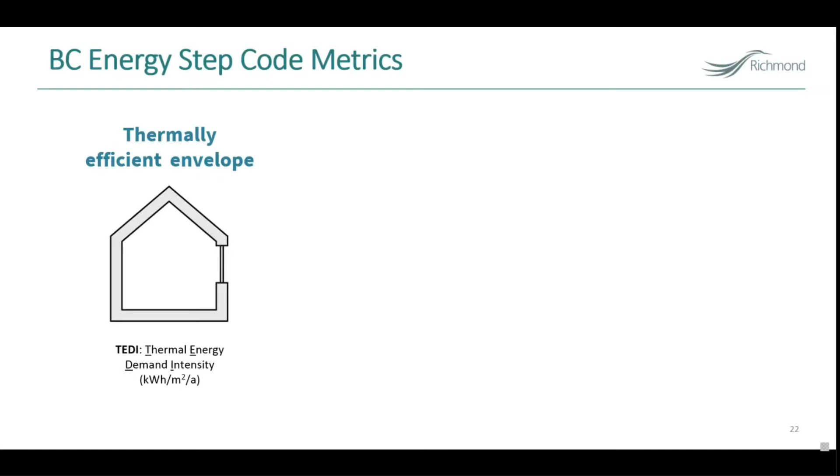Then we're looking at the air tightness of the building. So basically the rate of air leakage into the building, which is measured and looked at in terms of the ACH. And then we have finally the so-called MEUI, which looks at the mechanical energy use of the building. So the idea here is that these three metrics in combination give a complete picture of how well the building has been designed and constructed in terms of the building envelope, and then how efficient these mechanical equipment are for running the building and for air conditioning and other services.

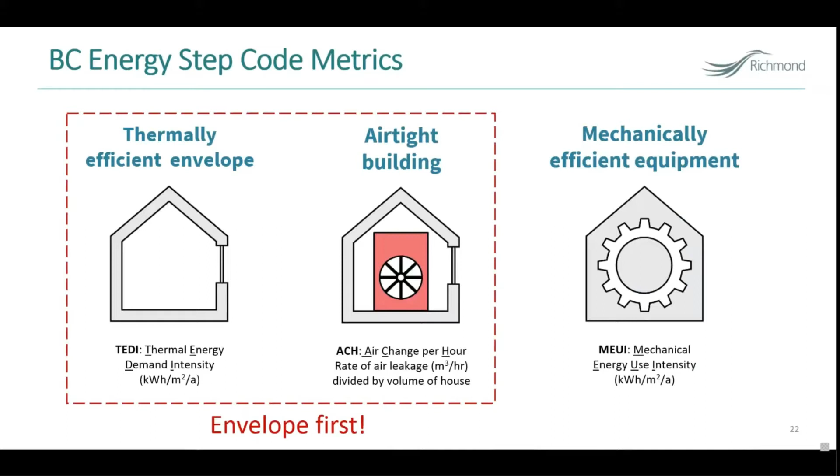So now the inclusion of these two first metrics, the TEDI and the air tightness metric, the ACH, is really based on the so-called envelope first approach, which is based on just very basic building science, which essentially means that the best and most sustainable way of achieving energy efficiency and net zero energy readiness in the building sector is to start with a highly efficient building envelope, which is also airtight. So that was recognized in the procedure leading up to the development and adoption of the Energy Step Code. So that was great. This was recognized, and that was the reason we had these three different metrics.

Now, what happened last year, last November, and I think coming into effect last December, was that there was a revision to the building code, as is usual every couple of years or every year. And then in that revision, among the changes pertaining to energy efficiency and the Energy Step Code specifically, a new metric and a set of new targets were introduced for looking at the thermal performance of your building envelope.

So here in this table, we don't need to get into all the details. I'm happy to discuss that in the question and answer section. But we had these targets for different steps, starting at step 1 and leading up to step 5, which is the stated end goal of the step code by 2032, and that's equivalent to net zero energy readiness. So we had these targets for TEDI, indicator of the thermal efficiency of the building envelope.

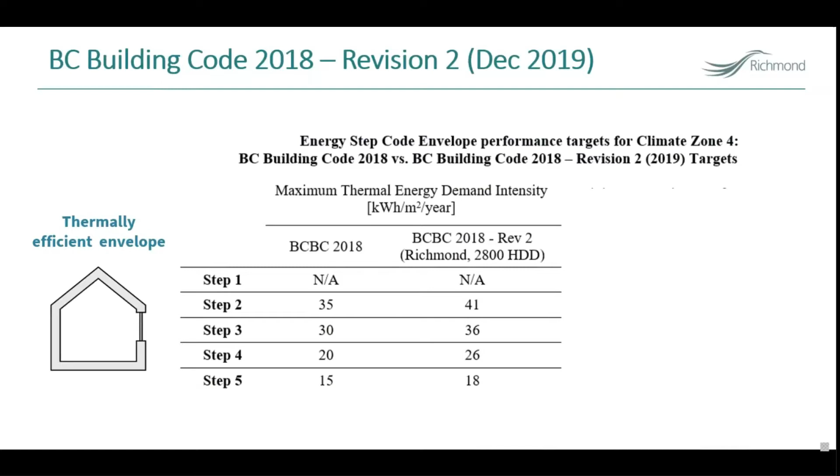The first change introduced last year was that the province introduced an adjustment to these targets. And as you see in the table, there is a relatively minor discrepancy, and basically it has become somewhat more lenient, which is cause for concern. But compared to the second change, which was the introduction of these relative performance targets, the reference building approach that Rob introduced, this is the real problem now.

And I remember when there was some communication from the Building Safety and Standards Branch from the province last year, there was an email saying, well, look, the new revision to the code is coming into effect in a few weeks, and these are some of the changes. And I was going through that, and I was obviously interested in stuff relating to the step code, and I came across these relative performance targets.

And I remember I looked at the target for step 2, and I looked at 5%, and I was going, really? How are you even going to measure that? Is it even meaningful, given all the building energy modeling tools that we have, to talk about 5% improvement? And that methodological question aside, is that even significant? Is that going to drive the change that we need to see in our building sector to move toward net zero energy readiness in a span of almost a decade now?

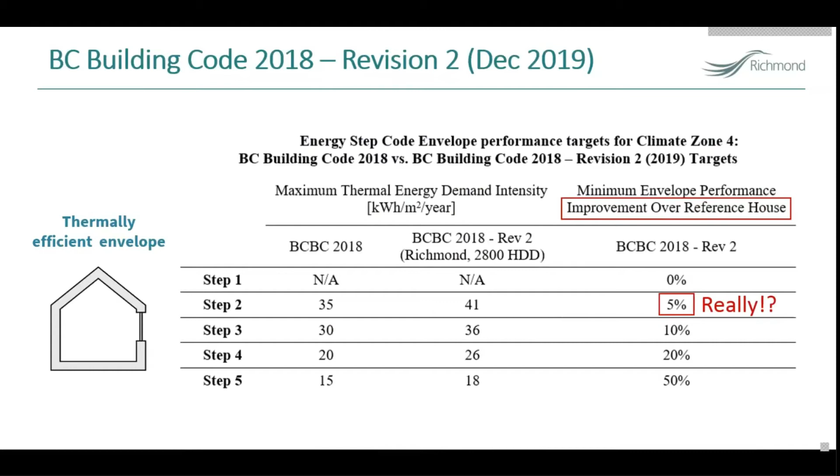So that got my interest, and I started looking into that in more detail. And fast forward a year later, I have spent a lot of time looking at data from our jurisdiction in Richmond and also other municipalities in our area. And then, to just sum it up very concisely, I think this graph will tell what's happening there and what the core problems are.

So here you see the average improvement in the thermal efficiency of the building envelope that we would get based on the original absolute performance targets. And here we're now looking at steps 2, 3, and 4, just for simplicity, but you can extend the analysis to the entire range from step 1 to step 5. So these were the original targets prior to December 2019, prior to the latest revision to the code.

And then those adjusted targets that I talked about, the minor adjustment introduced to still absolute numbers, are making things a bit easier. But then you look at the relative targets, so the intended improvement over the so-called reference house. And then you see there is this major discrepancy between what was originally proposed and put in place, which, as Rob mentioned, is informed by climate science. It's not some arbitrary number that we come up with.

This is based on the fact that the end goal is to achieve 15 kilowatt hours per square meter annually in order to make net zero energy buildings a reality. So you look at the blue bars here, and then you look at the red bars, which is what you will get from the new relative targets. And of course, if you have a more lenient, more easily achievable pathway in the building code, that's going to encourage people to take the easier route.

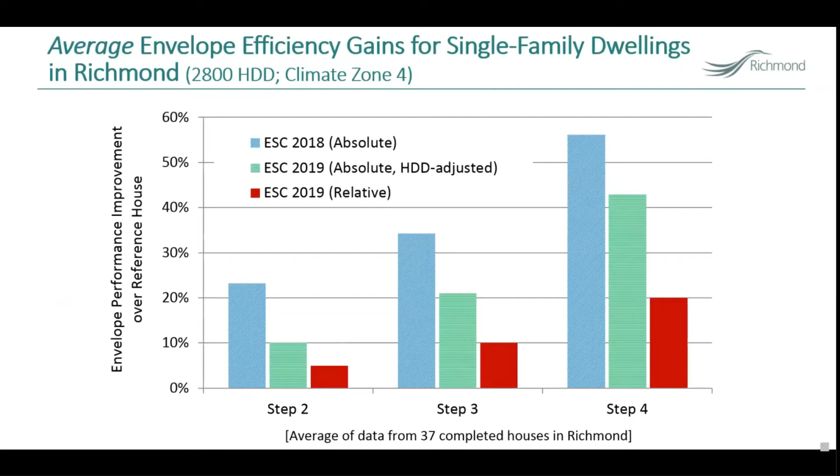But now, by extending that approach, which is also the approach taken in the national code, we are really watering down the energy step code. And our concern, as I'm going to go through quickly, is that we're not going to be able to achieve the goals that we have and we must achieve with this current code. Now, just to illustrate the problem and the disconnect that Rob mentioned, and the discrepancy that we see in these targets now, let's take a look at this graph.

Now, one of the problems with this reference house approach is that, as Rob mentioned, this reference house is a fictional hypothetical building where, in your building energy modeling, you're saying, okay, so I have this proposed design. What if I had built the same house, the same form factor, geometry, orientation, all of that, to the code minimum requirements, the prescriptive requirements of the code? How would my house have performed had I built it to code minimum? And then you run that in your energy model, and you compare it to the energy performance of your proposed house.

So these are all houses of the same archetype. So these are single family dwellings in the same climate zone 4. And now you see that depending on my design, where I'm putting my windows, how much window area I have, what is the orientation of the house, how much articulation I have in the building envelope, I have a very wide spectrum of my reference house TEDI.

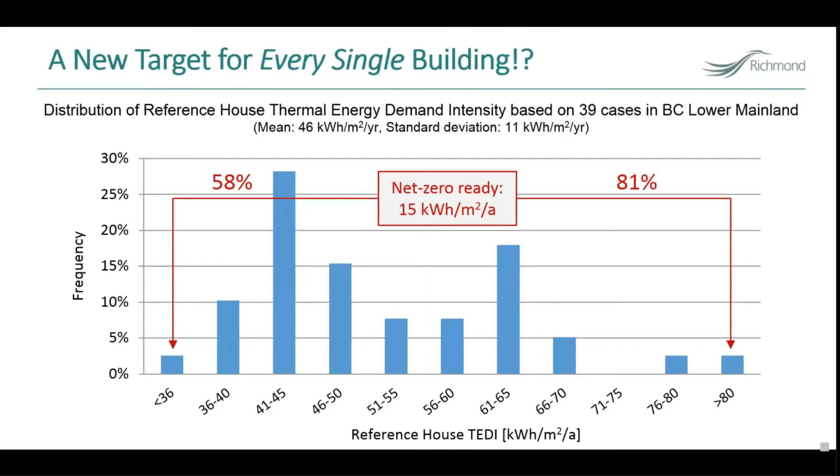So you have this very wide gap of what it means in relative terms to achieve our end target of net zero energy ready. And then what does the building code currently propose for step 5, which is supposed to be net zero energy ready? 50%. So that is cause of great concern.

And I know Rob has looked at this in more detail in terms of what it means in opening this entire process to gaming the system. So I'm going to hand it back to him to give us a few very interesting but kind of scary examples, and then I'll talk a bit more about some of the actions we have taken. So Rob, back to you.

Okay. Thanks, Sepehr. Yeah, that's really interesting, and seeing the actual data now coming out from buildings that are being built within your jurisdiction, I think is really illustrative and allows the issue to be brought forward. I'd like to just perhaps start with a couple of anecdotes before I speak to this diagram that we've got up right now, because I'm going to be speaking now about the reference building approach to show another issue with it.

But the reference building approach is thought, perhaps by some at any rate, to be necessary or appropriate because the absolute targets are too hard to hit. But what we're seeing now in BC, and the same issue will come up across the country once the new codes come in, is that the absolute targets under the STEP code are absolutely too easy as builders are being trained how to build them. And there's interesting little anecdotes coming out.

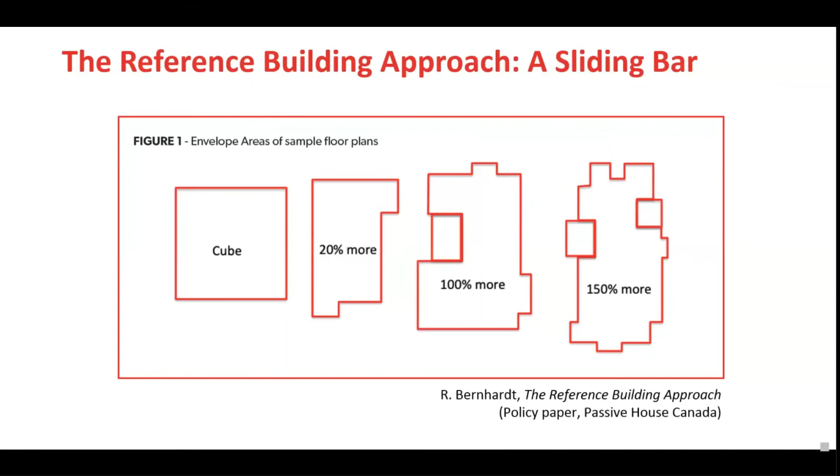And that makes the home relatively expensive, because you pay for all of this by the square meter. When you get into McMansions or into custom homes or mansions themselves, the numbers are way higher. You can easily get into 250%, 300, 350%. So the range that we're showing here is a really normal range, other than only a few people build at the efficient end of the range.

Many people thought when the step code was introduced and identified 15 kilowatt-hours per square meter that was passive house performance. In fact, the details are defined differently, and it never was the same. There was initially some thought that the definitions would be improved, so it would be the same. But right now, the Step 5 home in Climate Zone 5 is able to use about double the energy of a passive house.

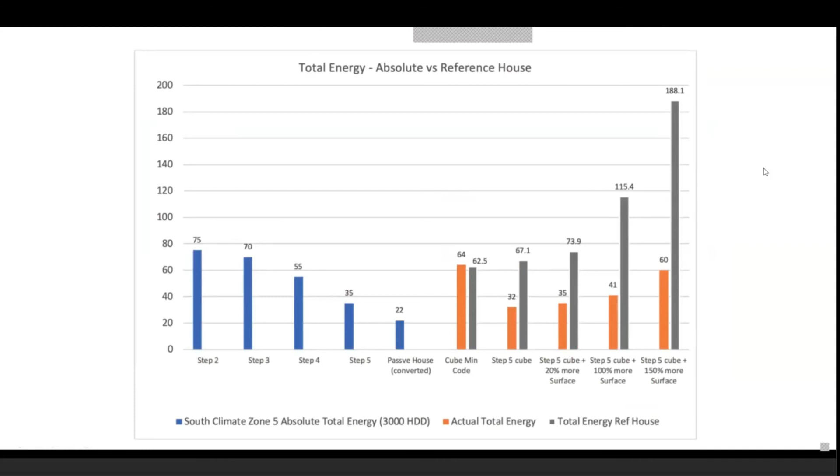I lower it so much that with doing a few basic things, I can achieve 50% improvement, because achieving 50% improvement on such an inherently inefficient design is not going to be difficult. And then I'm going to call it Step 5, and then all the marketing advantages that Rob talked about. So I think this is very serious.

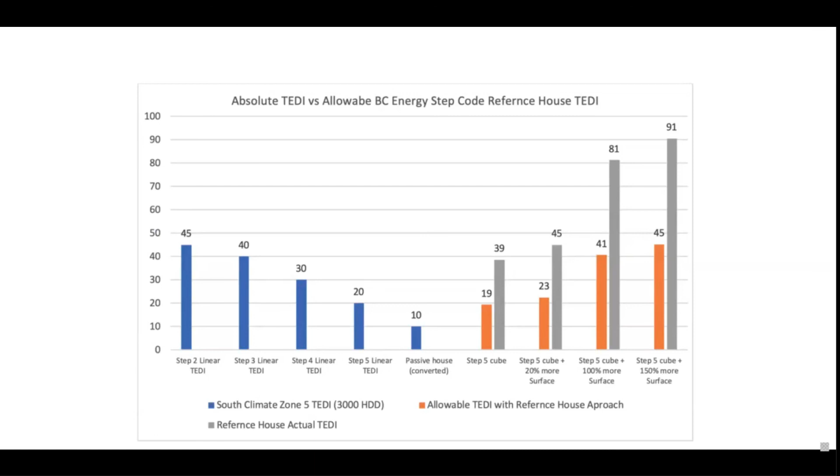Now, as I mentioned, we have been looking into this for almost a year now. We recently took a report to the council, and this was received well. So we are now writing letters. We are asking the council and the mayor to write letters to the ministries involved and responsible for this, and we really hope to see these missteps reversed, and then this relative performance approach and targets stricken out of the step code.